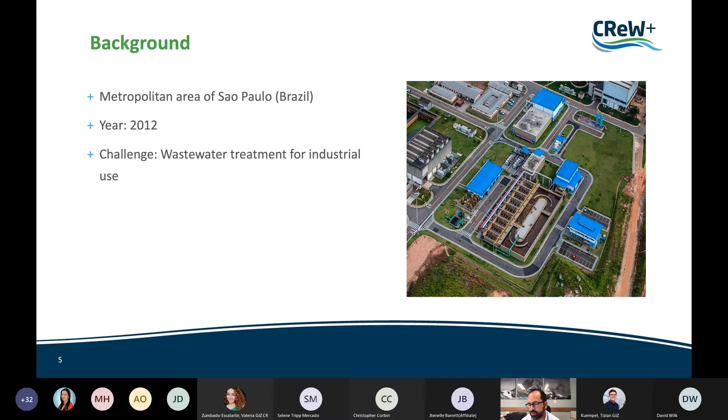So let's start with Brazil, the Aquapolo experience. Aquapolo is the name of a company that has been created in Sao Paulo, in Brazil, in the year 2012. The challenge they faced was to generate some treated wastewater for industrial reuse. You can see a picture of the facility, very high-end facility that is capable of actually retreating wastewater in order to achieve a degree of treatment suitable for industrial reuse.

As I mentioned, this Aquapolo company is called Aquapolo Environmental. The company was created for a specific purpose, and the stakeholders of this company are the main utility in Sao Paulo, Sabesp, and also this other company called Inima Brazil. So they have invested in designing and implementing this treatment plant.

This new company signs a contract with Braskem, Brazil. Braskem is a very large petrochemical company in Brazil; some of their plants are located in a petrochemical pole in Brazil, a very important operation there. And so they signed a contract with this newly created company for 43 years.

And they assure they will buy treated effluent of at least 300 liters per second, and they will use that effluent for 43 years and an extendable period of 10 additional years. The total investment for this plant was $23 million. 25% of this investment was paid by the shareholders, and 75% was financed by the Brazilian Development Bank.

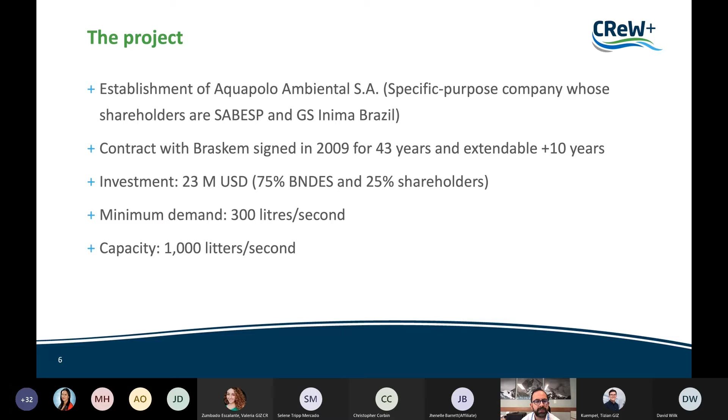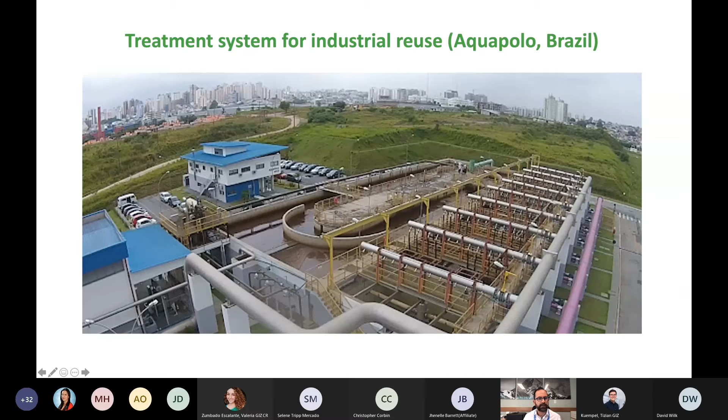Even though the minimum demand for reuse was guaranteed to be 300 liters per second, the expectation was higher, and the treatment plant was designed for a capacity of 1,000 liters per second. So a very large plant. Here's a close-up of the plant. You can see urban centers, cities in the background.

And here we can take a look at the treatment train for this plant. So there are several municipal wastewater treatment plants in Sao Paulo. One of the larger ones is called ABC Wastewater Treatment Plant. So after the water goes through the conventional ABC treatment plant, then it comes into the Aquapolo operation to receive basically tertiary treatment. The first tertiary treatment it receives is done through biodiscs.

Biodiscs are discs that spin. Half of the disc is within the water, half of the disc is outside of the water. So as it spins, it gets wet and dries up, wet and dries up. So it's an aerobic system used mostly for nitrification and denitrification processes. So basically to remove nitrogen from water. Very interesting technology, very compact. Biofilm develops on top of the discs, and this biofilm is exposed to water and to the air on and off. So that's why this is an aerobic process.

And then we go to an anoxic reactor, very little oxygen there, to complete the denitrification process. After that, the treatment train divides in two parallel lines, one with ultrafiltration and the other one with reverse osmosis. So this ultrafiltration process is a much finer filter in order to reach a higher level of treatment suitable for the industrial purposes they needed to serve.

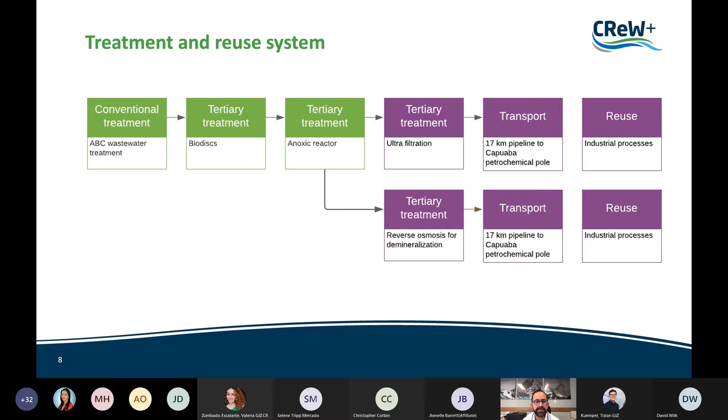So this is where the impact and the benefits of this operation that started in 2012. Currently, the demand is 650 liters per second. Remember, we have a capacity of 1,000 and a guaranteed minimum demand of 300. So currently it is generating twice as much water as they started with. And the main benefit is that this is reducing the need of exploiting drinking water. So before this plant was built, all these industrial companies would take water from the drinking water network. So what they have done is to replace the drinking water network as a source with this reclaimed water.

And if you can see in the back of the picture, there's a purple pipe. That purple color denotes that it is treated effluent for industrial reuse. We usually use that purple color for that. And the companies that use this water end up with savings of about 33% as compared to the tariff they used to pay for potable drinking water in the past. So there's a big savings for the companies, for the final users.

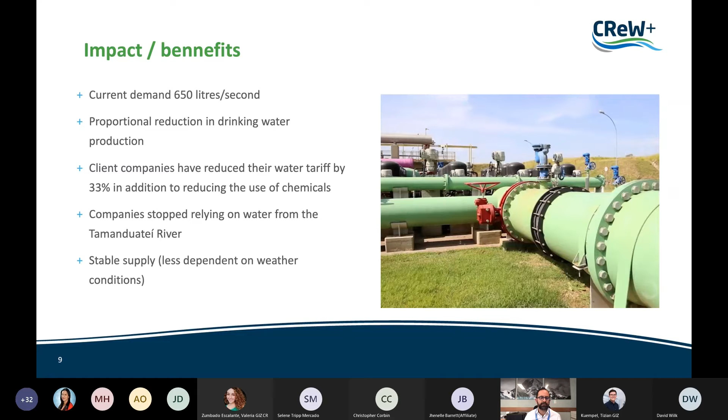So that's the final results that they have obtained in several years of working with this plant.

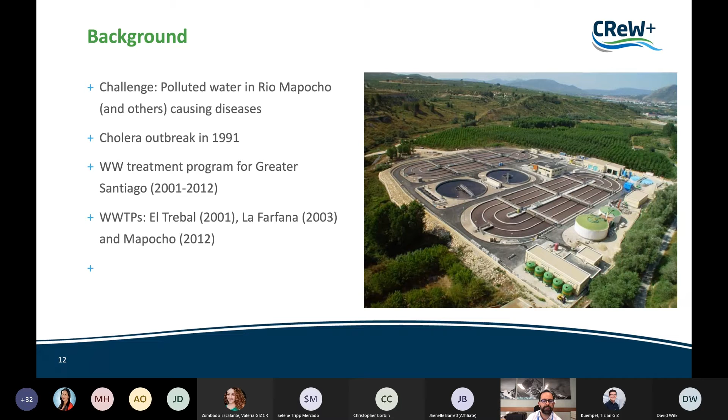And these very large plants were implemented, at least 3 of them, El Trebal, La Farfana, and Mapocho. The last one is the one we're looking at in this case, Mapocho, which was built in 2012, as well as the previous case. The owner of this treatment plant is the utility operator of Santiago, Aguas Andinas. This is a subsidiary of Suez Group. The plant has a capacity of 380,000 cubic meters per day. The initial investment was $150 million US.

And what is very interesting about the Chilean case is that Chile has a very advanced subsidy system. All households in Chile are categorized depending on their income level. So they have this huge national database of households and their income level, and the subsidy is directed specifically to households that belong to the lowest income levels of these categories. So instead of subsidizing a specific municipality or a certain area of the city, the subsidy is direct to people who need the subsidy.

So the result of this system is that the people that have the lowest income pay a much lower tariff than the rest, based on their income, and that's how they have managed that everybody has access to drinking water, also to wastewater treatment, because everybody is paying a tariff that is affordable for them.

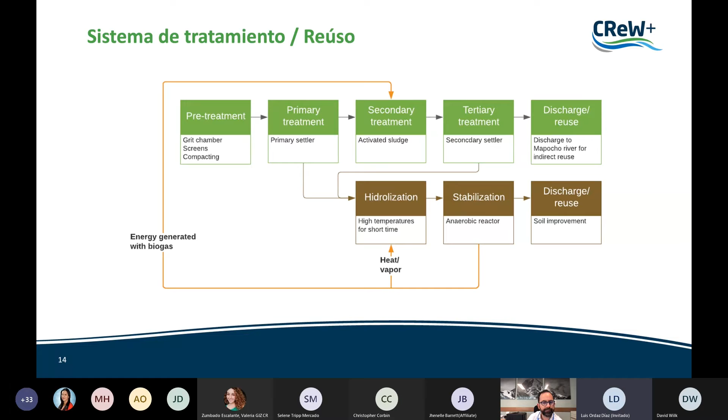Some of the impacts and benefits that were generated by this system in Santiago: basically the health risks of the river water were virtually eliminated. No more cholera outbreaks happened afterwards, and the quality of the rivers is very, very good right now. The area under irrigation with safe water reaches around 130,000 hectares, so a very significant irrigation area. On the other side, this type of solution requires high investment cost, and it also has a very large carbon footprint of the treatment process because of the use of energy.

Now we will move to Nicaragua, to Lake Managua. Lake Managua is the largest water source and water body in the region. The city of Managua is basically next to the lake. This project dates from 2009. The challenge was to protect Lake Managua. The local name of the lake is Xolotlán. The challenge was to protect this lake from domestic and industrial wastewater pollution.

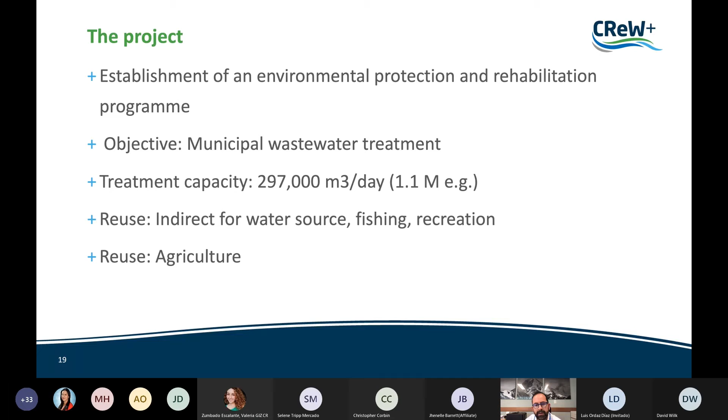From the beginning of this project, there was a reuse intended for water, indirect reuse, because the water is discharged into Lake Managua, and there's a lot of fishing going on there, also recreation. So the idea of protecting the lake is to be able to reuse the water of the lake as before. But there was also an additional reuse in agriculture for the sludge generated in the plant.

The owner and operator of the plant is ENACAL, the Nicaraguan utility which operates in Managua. And the financing for this project came from KfW, the German Development Bank. The total investment cost was 25 million euros.

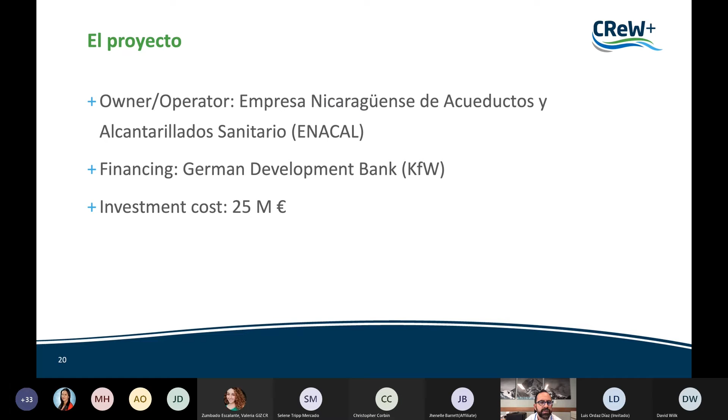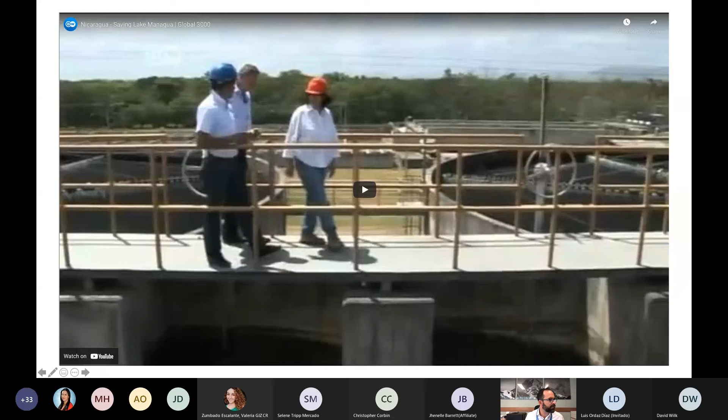Fishing on Lake Managua. For many locals, it's still their only source of income. So now it's no problem for us and our families to eat our catch. The wastewater treatment plant is located on the outskirts of Managua, the Nicaraguan capital. For decades, the sewage from more than 1 million people flowed directly into the lake. But that all changed in 2009. Now, 2/3 of Managuans are connected to the sewer system, and their sewage ends up here.

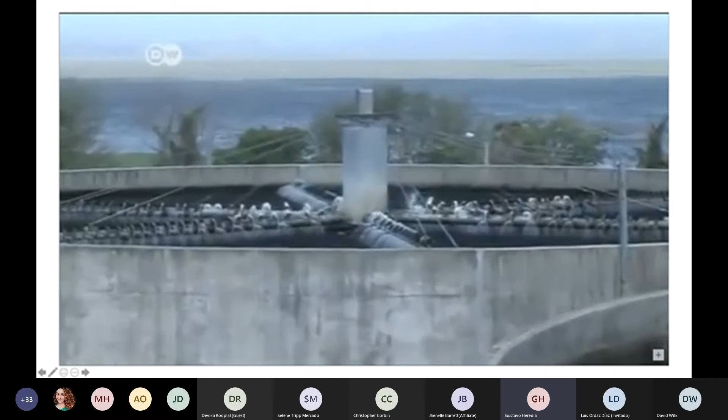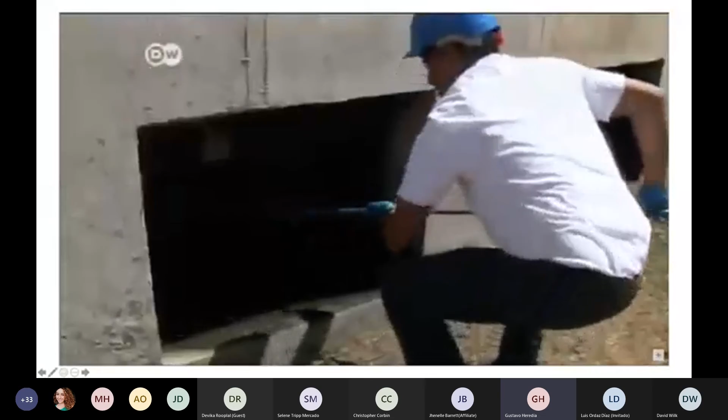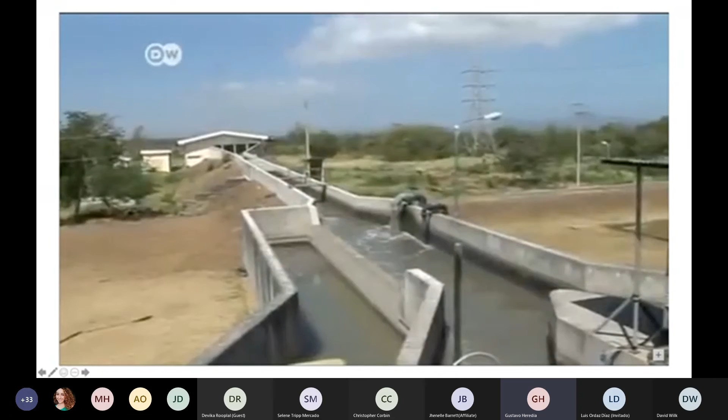During a tour through the treatment plant, students learn about water management. The plant's operator explains that more than 90% of the solid matter is filtered out. That still doesn't make the water safe to drink, but it's much cleaner than before. Using the latest technology to produce clean water, many of the students see this as a dream job. The sewage treatment plant in Managua is the first of its kind in the region. There's nothing like it in all of Central America.

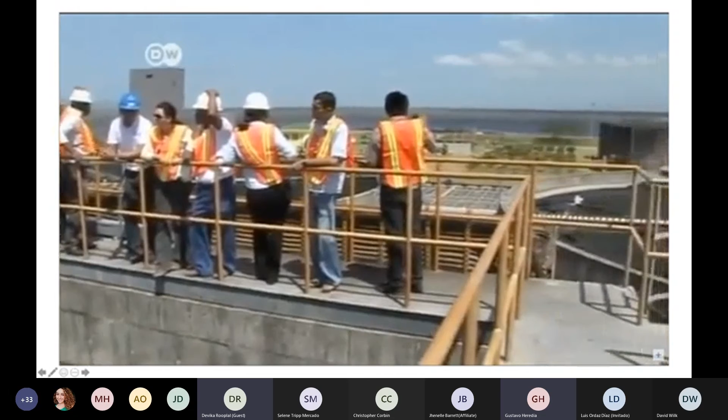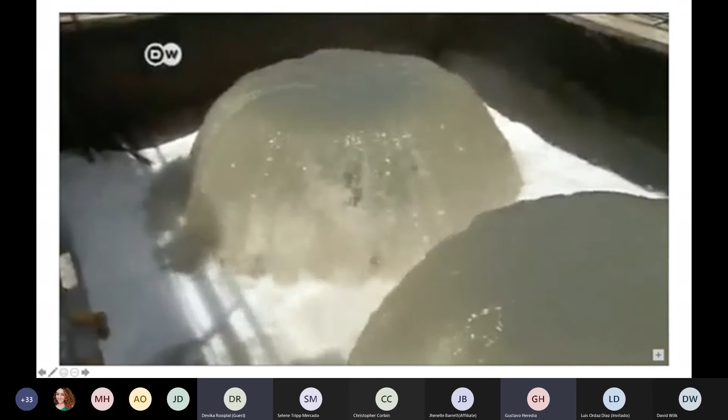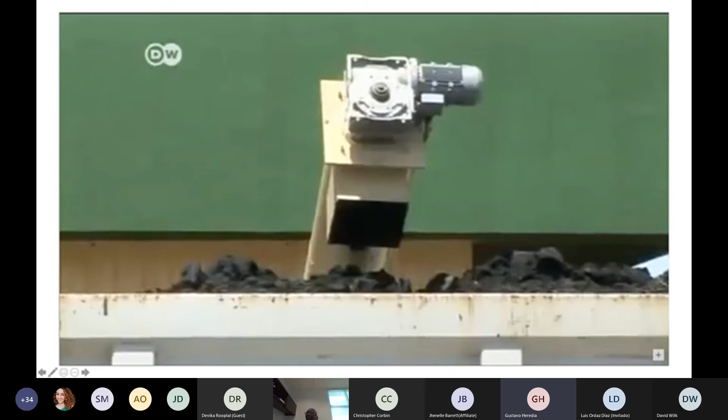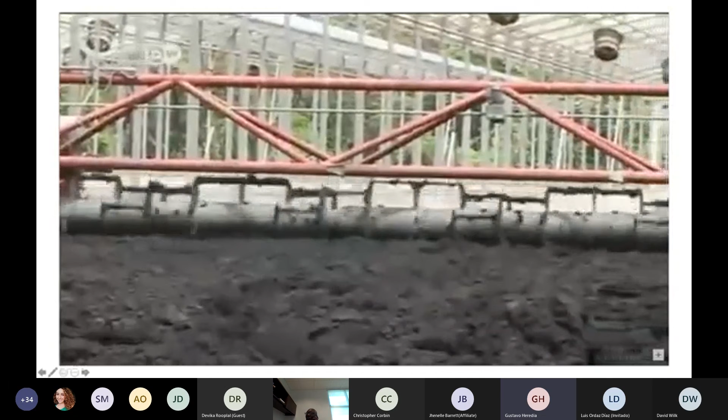A new idea is to cut down on operating costs. The sewage sludge is aerated and left to dry in the heat until it forms a granulate, producing a new, all-natural fertilizer. The first farmers are coming and picking up this granulate at their own expense and experimenting with it.

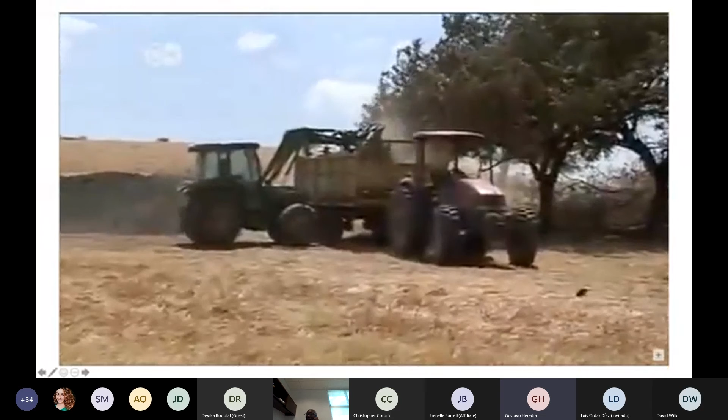The first customer is a dairy farmer, though no ordinary one. Ricardo Coronel Kautz used to work for the Ministry of Agriculture. Now he uses the granulate from the sewage treatment plant to fertilize the grass in his pasture. Does he think it's a good alternative to chemical fertilizers?

I think it can soon replace synthetic fertilizers. The world's population is increasing, so it's a step in the right direction. In China, it's common to use human excrement, and we need to start doing that too.

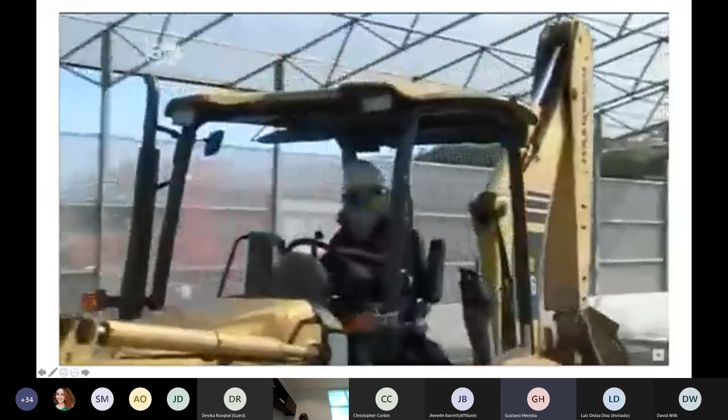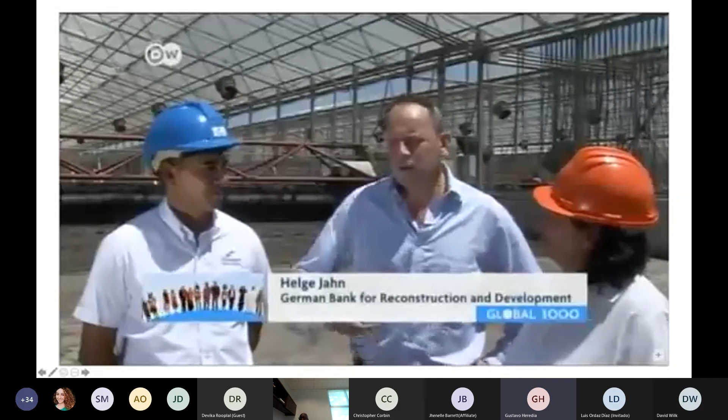Switching to the new granulate could save a farmer around 30 tons of chemical fertilizer a year. That's cost-effective for the farmer and for the sewage treatment plant, since it no longer has to dispose of the sludge. It's good for the environment as well. Synthetic fertilizers are usually made from fossil fuels. The more people use waste products to replace synthetic fertilizers, the more they contribute to the reduction of CO2 emissions.

Reducing greenhouse gases and improving water quality have proved a boon to the ecosystem of an entire region. Lake Managua is connected to the much larger Lake Nicaragua, which lies some 50 kilometers southeast of the capital. On the western shores of Lake Nicaragua, we find the city of Granada. Its lovely colonial-era buildings have made it the country's biggest tourist destination.

But just a few hundred meters away from the city center, the view is less appealing. Barely a quarter of the households here are connected to the sewer system. Helge Jahn from the KfW has an appointment with a man from the public water utility. The development bank is willing to offer funds to treat the sewage, which is already contaminating the city's drinking water. If nothing's done, people could become ill.

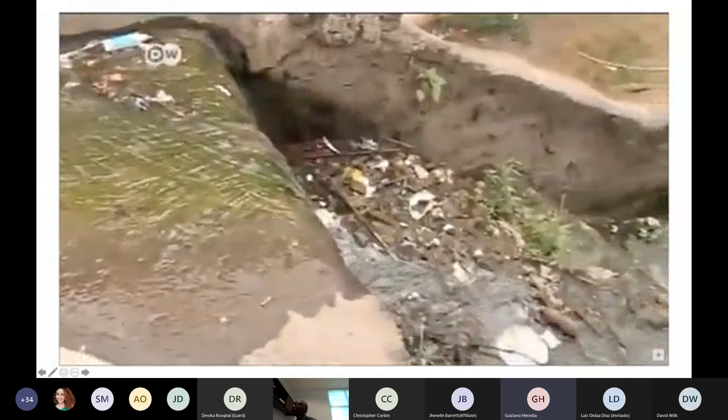The sanitation problems are reflected in the health of the people. There are many infectious diseases. The wastewater problem doesn't just look unsightly, it also affects people's health. Helge Jahn wants to help. The number of residents in Granada connected to the sewer system should rise from 20 or 25% today to 80%. The second part of the project will be to overhaul the existing sewage treatment plant that's not working properly.

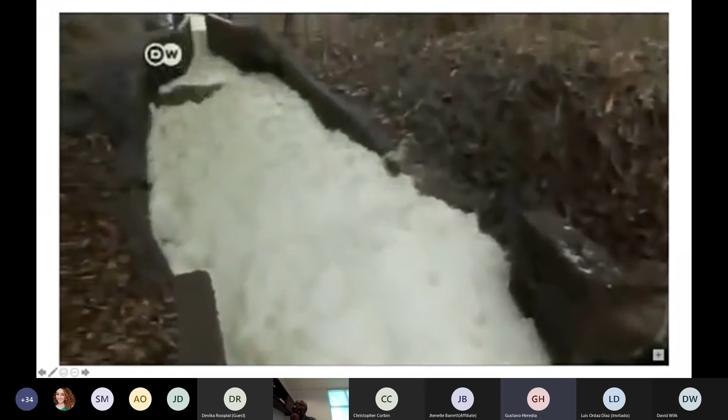Even after it's been treated, the water still looks like this, contaminated with algae and residue from detergents. More than 17 million euros are to be invested in Granada to improve water quality and keep the lake clean. That's vital. Lake Nicaragua is the largest drinking water reservoir in Central America.

Right, so that was the case of Lake Managua, Nicaragua. Now let's stop this. Let's look at the treatment train here for this plant. Get my camera back. Okay, as usual, we have a pre-treatment stage. In this case, we have screens, then we have a grit chamber and fat separation. After that, for primary treatment, we have a lamella settler.

I don't believe we have seen specific lamella settlers in our session 2 on technical issues, but a lamella settler is a very efficient settler. We can settle solids just in a tank, right? As long as you give water enough time sitting in one place, you will end up settling all the settleable solids in the bottom. But when we have a large flow, then we need larger and larger tanks for settling.

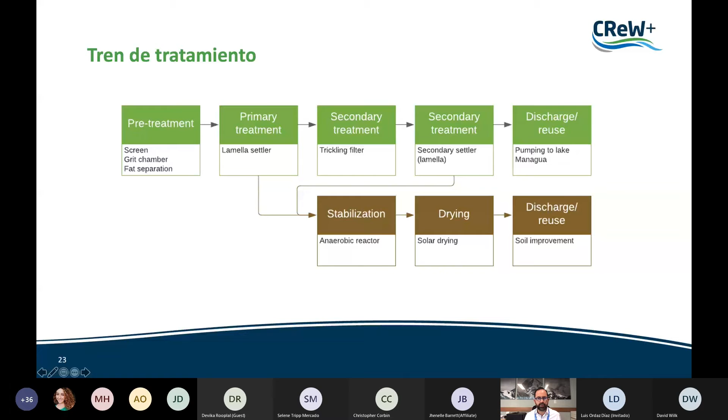And this is what makes this plant very interesting. And after that, the sludge, the dried sludge, is ready for reuse. In this case, the sludge is being used for soil improvement, so for agricultural purposes. This is the drying, the solar drying system. It's basically like a greenhouse. It's over 1,000 square meters, so pretty large, 116 meters on one side and 11 meters on the other side.

Nevertheless, this system is low cost, energy-wise it has very low energy consumption. In this case, they are using 20 kilowatt hours versus 800 or 1,000 kilowatt hours that they would otherwise use with industrial dryers such as a centrifugal system, for example. The time it takes to dry the sludge in these facilities is around 30 days, and the final product is about 87% dry matter. So that's very dry. It's very good for moving this sludge to other places where it's needed for reuse.

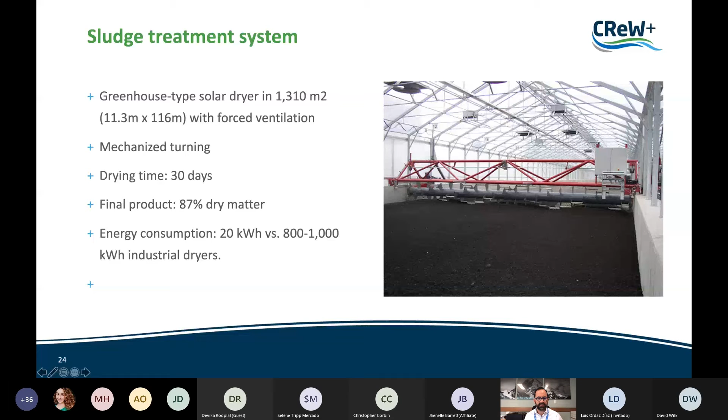As we mentioned before, the total investment was around 25 million euro for this plant. From those 25 million euros, about 5 million euros were invested in this drying facility specifically for sludge. This is one of the largest facilities for drying sludge this way, using this specific technology, which I find is very appropriate for the area and for warm places. It lets you do a very good job at drying the sludge at very low cost and very low energy consumption.

Some impact and challenges of this project: the concentrations of BOD in the lake were reduced as compared to the levels before the plant was implemented. The water is much clearer now. But on the other hand, the oxygen levels have not really improved in the lake. And even though the municipal wastewater is being treated in this facility, there are other effluents that are still going into the lake that are not being treated, coming mostly from industrial activities and also runoff from agricultural fertilizers.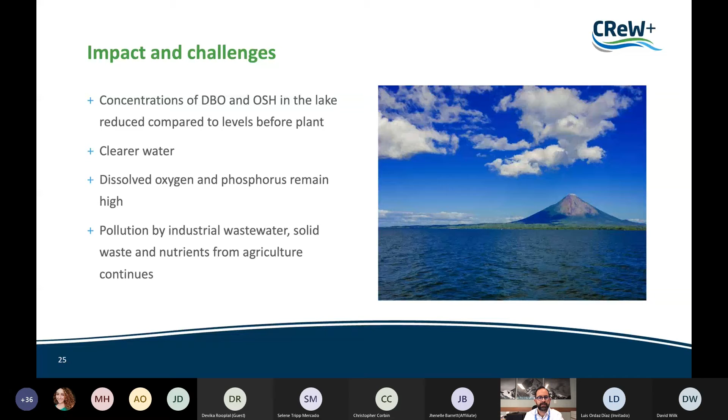So there's still some eutrophication going on in the lake due specifically to other industrial effluents and also the excess water from irrigation that still contains fertilizer residues, nitrogen, phosphorus, and that's still a challenge that the lake is facing. As in the other cases, we have the references at the end of the presentation that you can look into.

Jhenelle, I don't know if maybe we have some questions until now before we move on to the other two cases. Yes. Thank you, Gustavo. Morning, everyone. Questions from Mr. Corbin. He asked, in addition to the reasons provided for reuse, were there any other incentives or disincentives from the government to do reuse?

In the cases I have presented, they were not specifically government incentives. But the incentive is directly to the utilities for saving money. In the case of Managua, for example, the farmers go to the plant and they pick up the sludge themselves and take it to their farms. If they don't do that, then it's the utility who has to carry this treated sludge somewhere to the landfill or to dispose of it, right? And disposing of sludge also costs money, right?

So if you don't have anybody to pick up the sludge and take it somewhere, then you have to do that with a consequent cost, right? This is different from all the other cases. In the case of Brazil, for example, the incentive is that you are actually selling the treated effluent, right? And you're getting paid for it. So in the cases we have shown, the incentive is to reduce the operation costs of the plant.

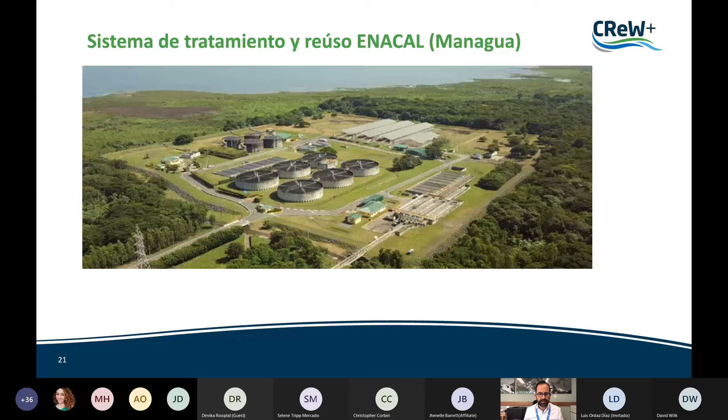Okay, let's move to the next two cases. The next one is Lake Patzcuaro in Mexico. Very interesting case. This is in the state of Michoacán. The Lake Patzcuaro sits in a water basin. All that region is a touristic place. It involves 4 municipalities, and in all 4 municipalities, they add up to about 120,000 people.

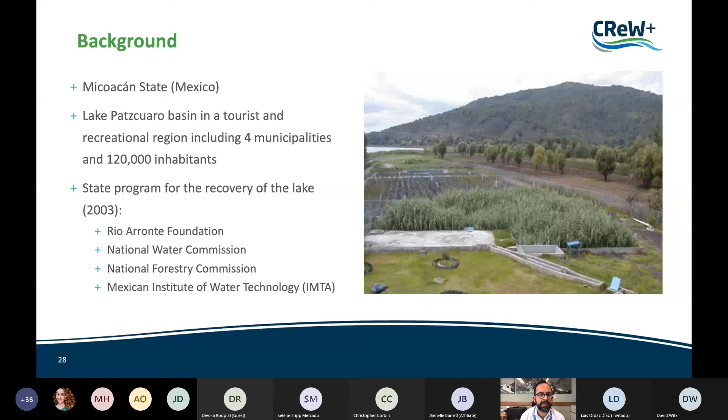These 4 national organizations got together in 2003 in order to start a program for the protection of Lake Patzcuaro. Rio Arronte Foundation, the National Water Commission, the National Forestry Commission, and the IMTA, which is the Mexican Institute of Water Technologies. So they all got together and they funded this project for treating wastewater for these 4 municipalities around the Lake Patzcuaro. In this case, they have used very low-cost technologies, and they have built 6 municipal treatment plants.

The plants go from a capacity of 43 cubic meters per day to 432 cubic meters per day. So these are basically small wastewater treatment plants. In this case, the reuse is direct for agricultural irrigation.

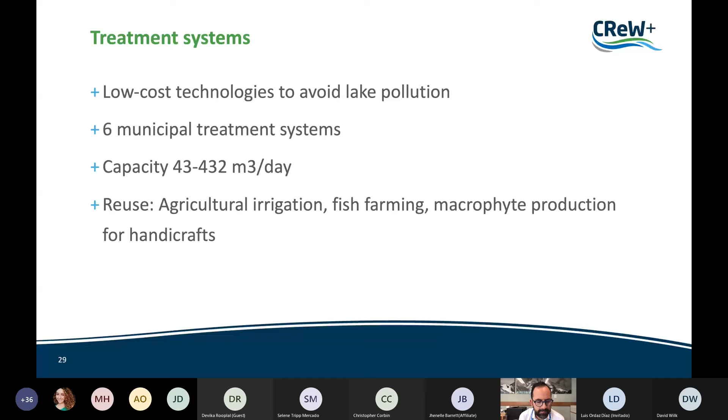The water that is discharged to the lake is also used for fish, and they also have pools for fish farming. And finally, for macrophyte production that people that live around the area use for making things, for ornaments and that kind of thing, for handicrafts. Yes.

We will see the treatment train here in pictures. First, we have the bar screens at the inlet of the plant and a grit chamber. Then we have stabilization ponds, and after the stabilization ponds, we have the constructed wetlands. So in this case, the primary treatment is a stabilization pond, and the secondary treatment will be done through constructed wetlands.

A constructed wetland, as we have seen in previous sessions, is basically a pool full of pebbles, in this case, gravel. You have a polyethylene liner in the bottom, and you can have 2 types of constructed wetlands. A vertical flow wetland, in which case you have pipes on top of the wetland, and then you trickle the water through the wetland in a vertical flow. On the last picture on the right, we have the horizontal flow wetland.

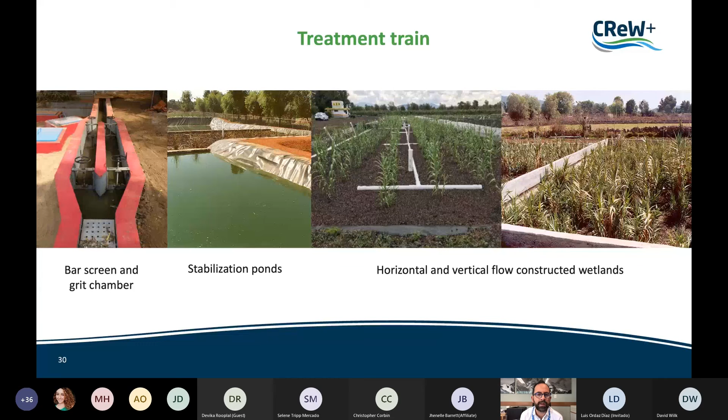In this case, the water goes into one side of the wetland and exits on the other side of the wetland. The difference is that the vertical flow wetland is more aerobic, and the horizontal flow is more anaerobic. Another difference is that for the vertical flow wetland, you usually need some pump to pump the water to the top of the wetland. So it also requires a little bit more of O&M operations.

You can achieve very high efficiencies in this type of treatment plants. Here we're comparing some of the parameters from 2 of the 6 municipal plants, in this case Santa Fe de la Laguna and Cucuchucho. The COD reduction goes from 91 to 93% in one case. In BOD reduction, 97% in the case of Santa Fe de la Laguna. In the other case, from 94 to 98% reduction. Also, from 93 to 97% reduction of total suspended solids.

And these treatment plants are less efficient at removing nutrients, right? So they are very efficient at removing organic loads and suspended solids, but they are less efficient at removing nitrogen and phosphorus. But in this case, we don't really need to remove all the phosphorus or nitrogen because we're doing direct reuse. So the effluent of the plant goes directly to the land to irrigate crops.

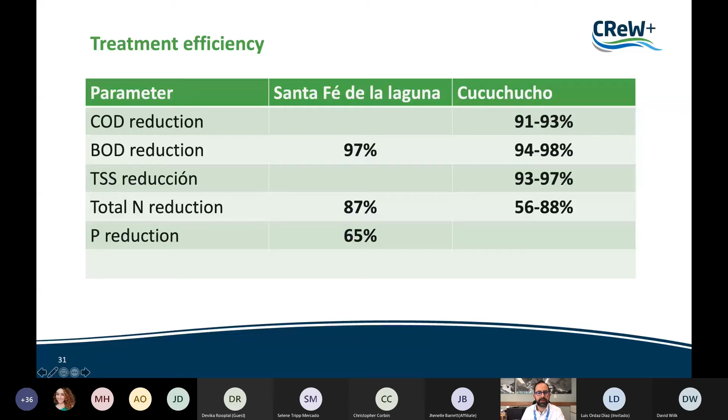Some of the challenges they have faced: between 2013 and 2016, they had some operation and maintenance problems, and a rehabilitation program was put in place to rehabilitate the wetlands that were getting clogged. After this process, operation and maintenance manuals were developed and the operators were trained.

We see this type of challenges and problems in many plants, especially on smaller, more decentralized plants that don't have a permanent staff, or maybe they don't have engineers, or they don't have all the resources in order to solve problems. So that's why it's very important to implement a management model that is according to the needs and the technical competencies needed for every system.

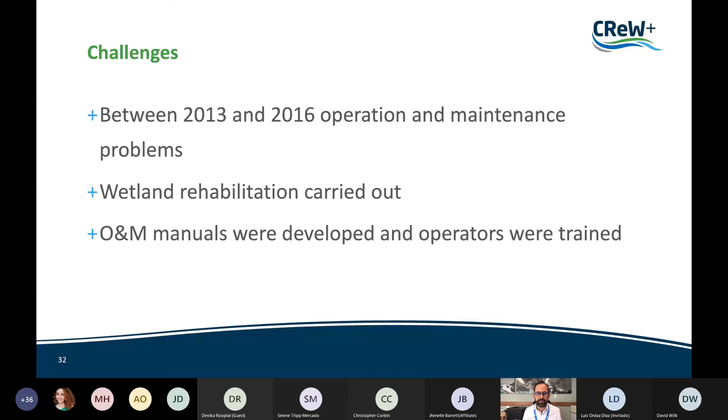So in very large centralized systems, we might have all the technical staff working on site at the plant, right? But in these smaller, more distributed systems, we have to link the system to an institution or to staff that will be capable of supervising, operating, maintaining the system, as we have seen in previous sessions when we were talking about the management and the business models in order to ensure the sustainability of the systems.

And finally, we will look at an experience in Bolivia, in which I have participated directly. In this case, we're talking about an area away from Cochabamba city, in which there are several small towns between 5,000 and 30,000 people. They were polluting the basin in this area, polluting several rivers and a water reservoir. There is a lot of existing agricultural activity in the area. The area is very dry. We get less than 400 millimeters of rain a year.

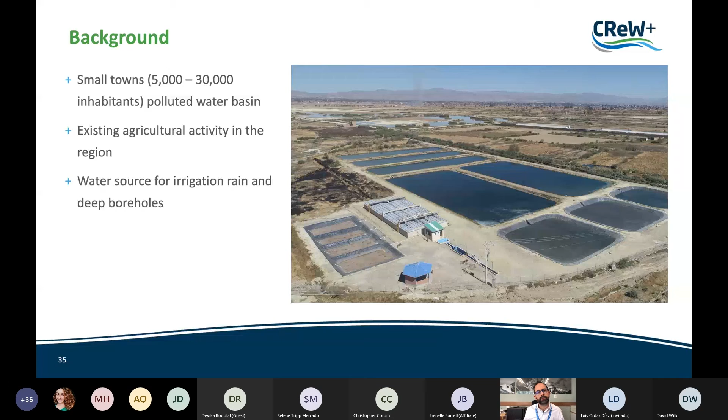And the main water source for irrigation used to be rain and deep boreholes. So farmers tend to drill deep boreholes, which range from maybe 100 meters to 120 meters deep, and they have to pump this water for irrigation. Since they have to pump the water from these deep boreholes, the cost of water becomes expensive, but that's what they have to rely on.

So we developed a project with the cooperation of the Swedish Embassy in Bolivia, SIDA, in partnership with the municipalities. The implementing agency was Aguatuya Foundation, an NGO I've been working for for a long time. The Aguatuya Foundation did all the designs, all the engineering, the implementation of these plants, and also manages and operates these plants under a contract with the municipalities. From the beginning, all these treatment plants have a reuse approach for the sludge and also for the treated effluent.

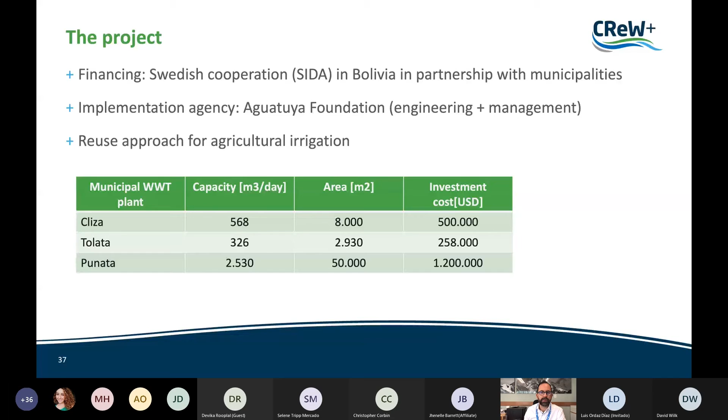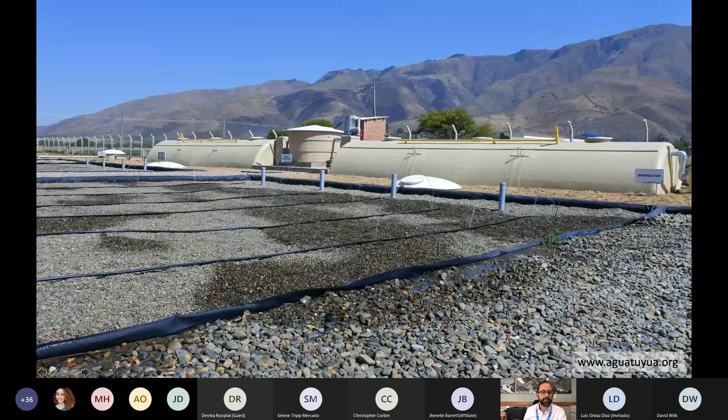It's more like a baffle reactor in which water goes into the first chamber, then moves to the second chamber, then to the third chamber. And as water undergoes a primary treatment. And after that, we have an unplanted gravel biofilter. So this is similar to a constructed wetland, but we don't have plants, so we call it an unplanted gravel biofilter. We are combining here vertical flow and horizontal flow, as we will see later on in another diagram.

In this picture, we see also anaerobic reactors. This one is for 10,000 people. And in the background, you see all the reuse activity in irrigation of maize and alfalfa. So in this case, this plant does not have a disinfection step. So we have restricted reuse for irrigation. So basically, the treated effluent is reused for irrigation of fodder, maize, alfalfa, but not for lettuces, tomatoes, and other types of crops.

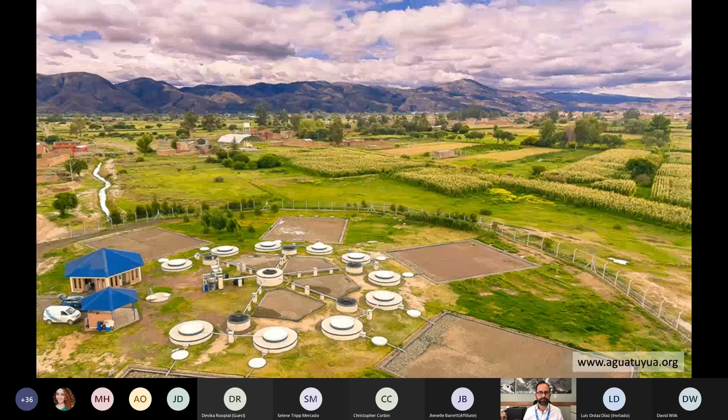So that's the type of combination you can have also. Either you treat the water to a higher level in order to have unrestricted irrigation, or you treat the water to a lesser degree, but you have some restrictions for irrigation. So this is the multiple barrier approach of the World Health Organization to irrigation. In this case, you can see all the land being prepared for irrigation with the treated effluent.

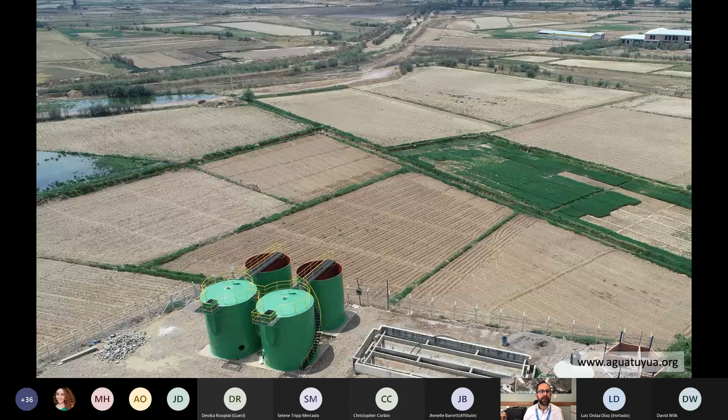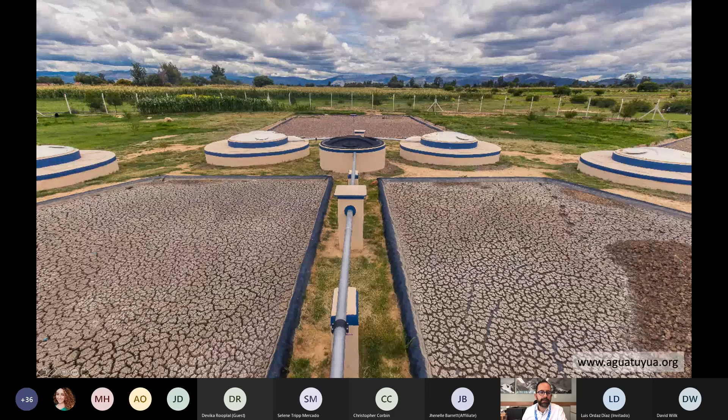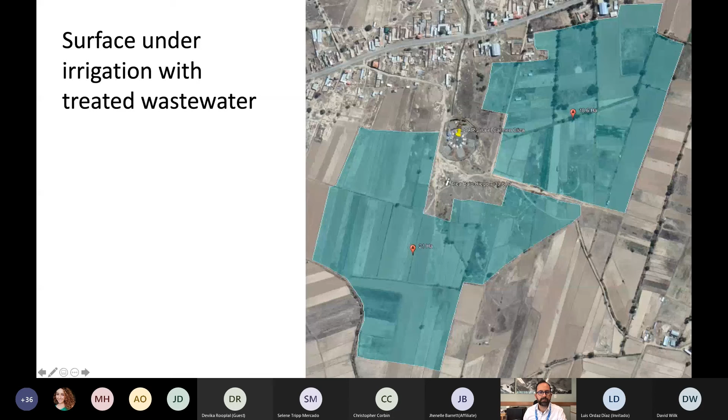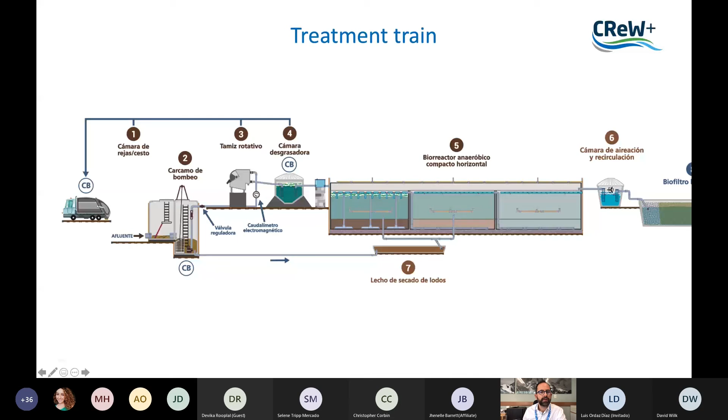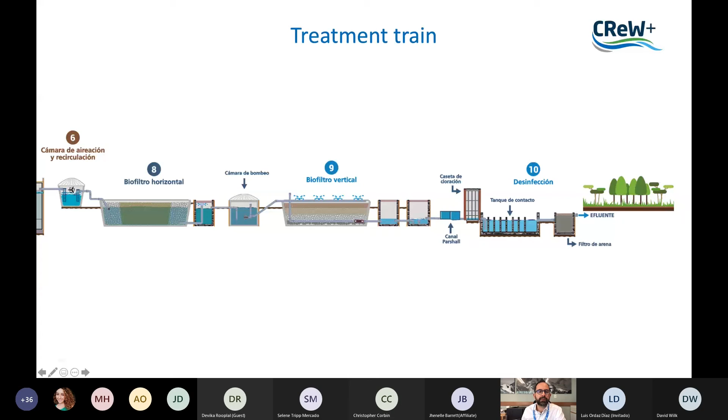And now we will take a look at the treatment train here. First, we pump the water into the plant. We have an automatic revolving screen for fine screening here, fat separation, the horizontal anaerobic reactor, similar to a baffle reactor that we saw on the picture. Then we have the gravel filter, first the horizontal filter, then the vertical flow filter. Then optionally, we have a chlorination tank that we can use in case we want to reuse the effluent for some unrestricted crop.

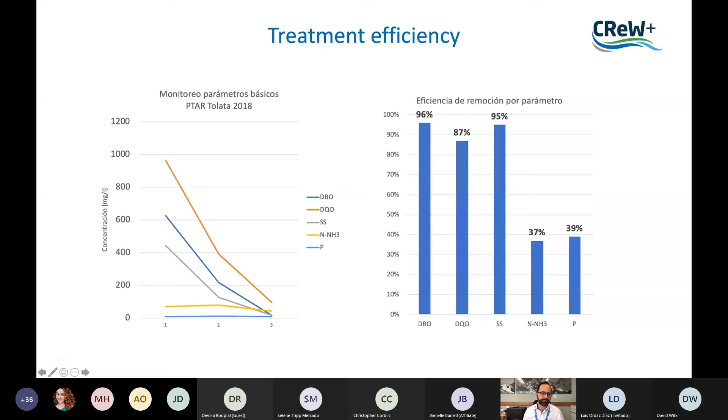And similar to the other case, we have efficiencies of around 90% and higher for BOD, for COD, and for suspended solids, and around 40% for the reduction of nitrogen and phosphorus. What I want to highlight in this case is the approach to a circular economy model. First, before we did this project, we had a linear approach to wastewater treatment.

We have deep boreholes for drinking water, so fresh water from the boreholes was pumped into the city, is still pumped into the city. The water is used in the city, it turns into wastewater, and it was discharged untreated into the river. That was the previous situation. And in parallel, farmers around the small town would grow their crops. They would irrigate the crops using water pumped from the boreholes. Also, they would use water from rains.

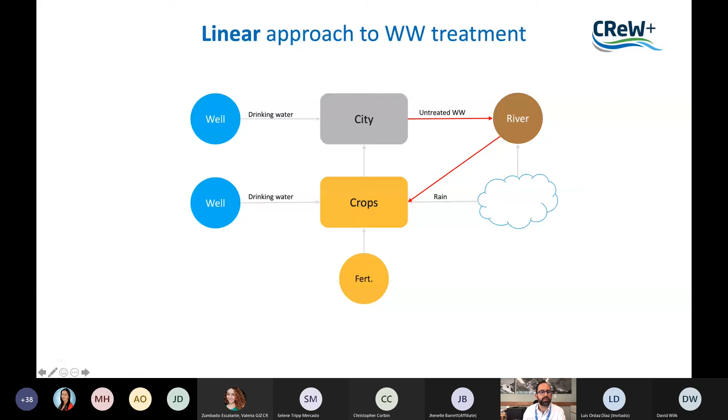And in some cases, they would also use the water from the river, which was very polluted, so untreated water being used for irrigation, especially when they didn't have access to a deep borehole. And we also show here in the bottom the fertilizers coming into the cropland, and then the crops going into the city for food for the citizens. So this is what we have under a linear approach, in which we get fresh water from somewhere, we use it, and we dispose it to the river untreated. And there's not much connection between the farmers and the sewer system.

So what we have changed with the project is we have built a wastewater treatment plant. So the wastewater coming from the city will be treated, and then once it's treated, it will be discharged into the river. First, we're creating a reuse approach here, because the treated water goes into the river, and the river will appropriately recharge the aquifers with water that is not polluted, right? So we have a virtuous cycle here instead of the vicious cycle we had in the past. But more importantly, the treated effluent of the plant still has nutrients and can be used for irrigation of the crops.

So in the past, the farmers had to rely on more expensive water coming from the boreholes, or they had to rely only on rain, which is very scarce and is not reliable, because the farmers are usually waiting for the rainy season to come in order to plow the fields. And if the rainy season comes late, then they miss the chance. So from the wastewater, they have a very, very reliable flow all year round that they can use.

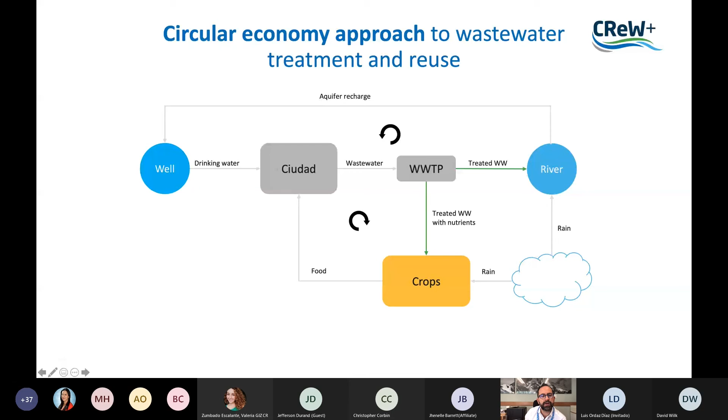because as we have seen in previous sessions, the treated wastewater might have higher levels of salinity, so it's a very good idea to combine with other irrigation schemes. But the crops go to the city, and the nutrients go again to the treatment plant and back to the crops, and so we have the circular approach here. We're closing the water loop, and we're also closing the nutrient loop. And we're putting less pressure on the aquifers because we're substituting the water from the underground resources by water coming from the sewer, and we're also substituting imports of fertilizers.

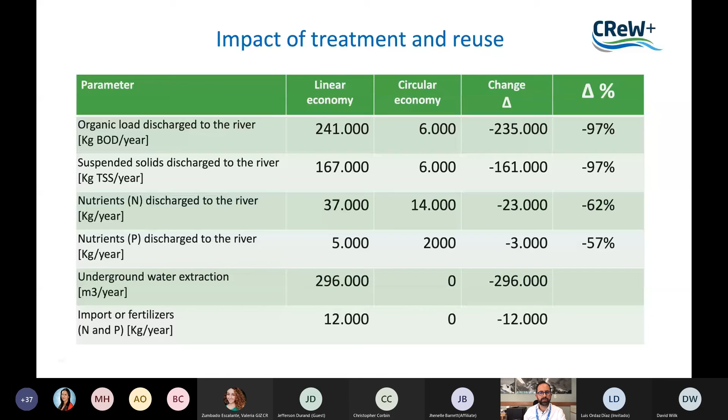I think for the conclusions, for all the cases in general, we have learned that the level of treatment depends on the type of reuse intended. So we have to start from the back: identify our opportunities for reuse, and then design the appropriate treatment plants. Depending on the local needs, we can opt for very large centralized systems or smaller decentralized systems. So it's not that one plant is better than the other.

We need larger plants for large, dense areas of certain cities, but we also need very small, decentralized plants for peri-urban areas, rural areas, for institutions, for places that are not connected to a centralized scheme. Only a combination of these distinct and complementary systems can solve the wastewater problem. Reuse in agricultural irrigation offers a triple benefit: water resource conservation, nutrient recovery, and eutrophication prevention. Finally, reuse generates opportunities for circular economy, because we're turning waste into resources.

Okay, do we have any questions, Jhenelle? Yes, because at least we have communication with our guest, right? Okay.